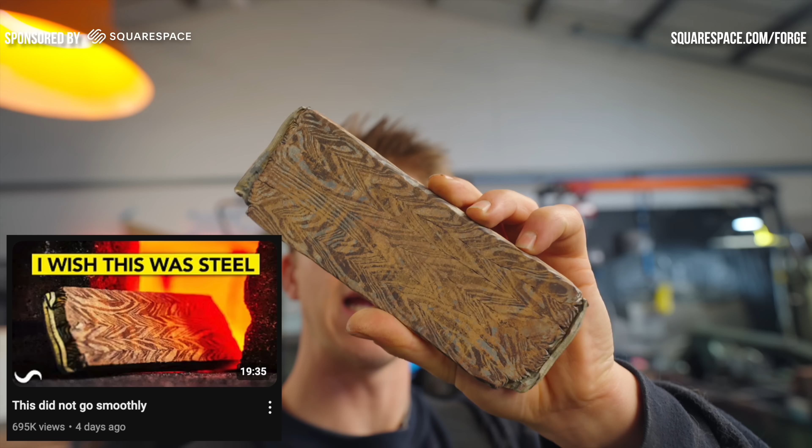In our last episode, we made up a multi-bar billet, and it turns out I definitely don't have the process dialed perfectly for titanium Damascus. Frankly, I'm a little nervous about how this billet is actually going to turn out. We've got to get through this skin and take a closer look. I've discovered a pretty nasty warp. Let's go straighten out that bend.

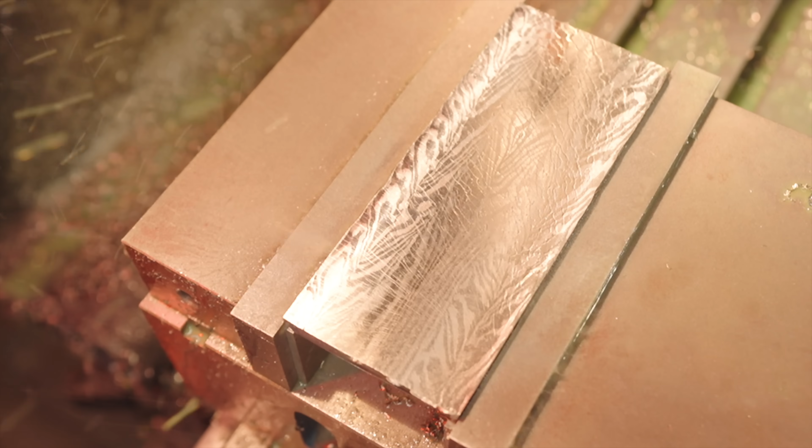At first glance, it's pretty cool, but look here on the end. Looks like we've got some delamination. That is definitely not welded. That's no good there. Yuck!

Ugh, it just doesn't stop. Every Sharpie mark is non-welded material. There's not a lot of thickness left to mill down. Maybe some of the cracks go away.

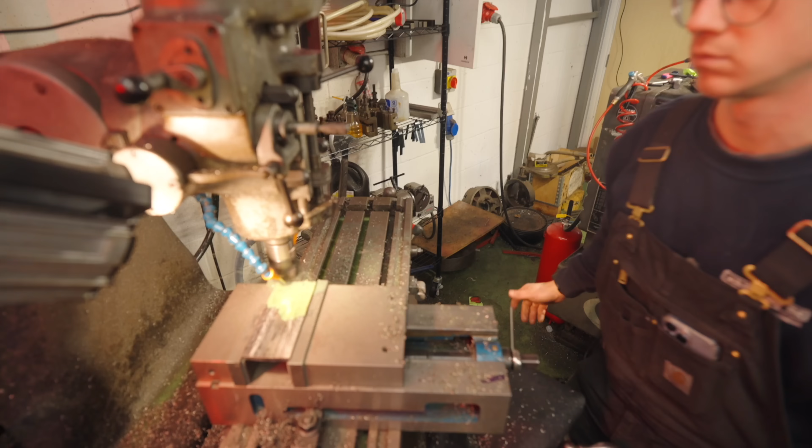Oh, better. That's better than it was. Might get away with something there. It's not perfection by any stretch of the imagination. We've got some funky spots in the corner, but in the middle it's not so bad.

I want to see how it looks with a little flame anodize before we keep cracking on. Golly, that looks epic. It looks so good.

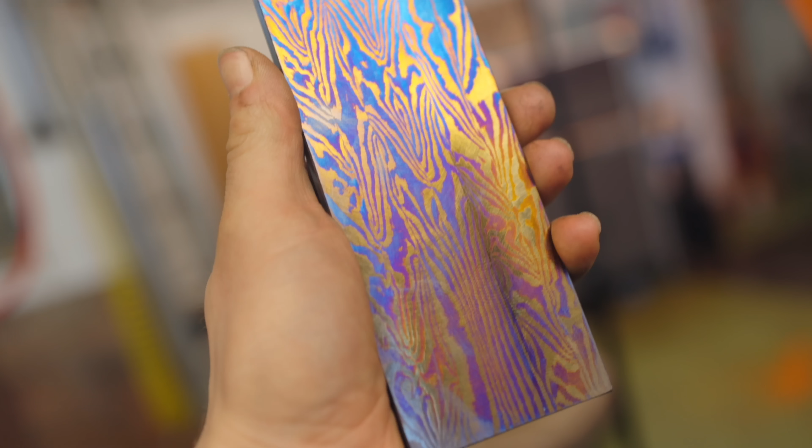That is pretty epic. Right, we now need some eye holes. We're going to cut them out on the Wazer, that's the plan. Just the eye holes first. We'll then machine the rest of it, and then go back to the Wazer for the final profile.

Of course, we're going to need a file for that. Not one of these, we need a cutting file. I guess files technically do cut, but this one doesn't fit inside the SD card slot.

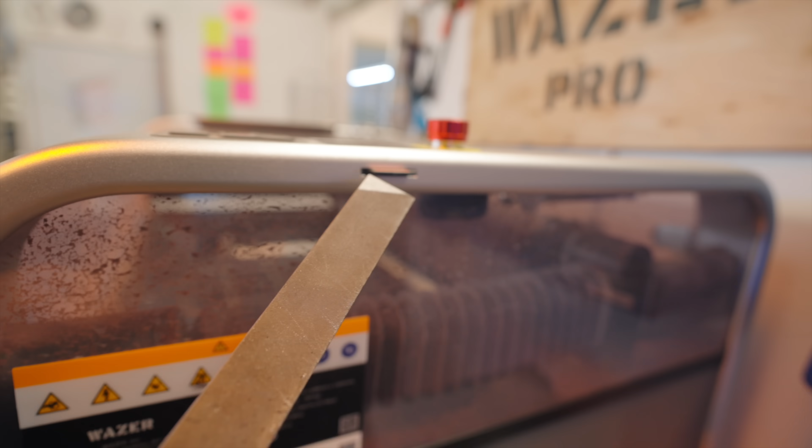So I took a picture of the glasses and then traced around it in Onshape. The plan is to go to the plasma CNC table and cut out a bunch of test samples from mild steel. I actually have no idea, I can't see anything because I don't have my glasses on.

So that we can test the fit of our cut file to the actual dimensions of the glasses that we're going to be stealing the lenses from. Pretty close, eh? The profile isn't fully identical though. Definitely needs some work on the hole shape.

How funny is that? They just sit there. Oh, very smart glasses. They'll be even smarter in titanium. Is titanium your favorite metal?

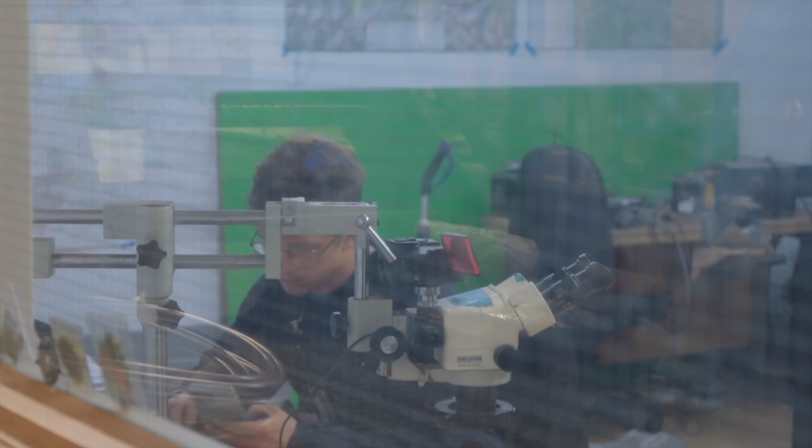So I've been doing a ton of iteration, specifically to match the curves to the lenses that we have. This is obviously a massive concern. Fitting up one of these lenses to a machined titanium frame is going to be really difficult. So I want it as close as possible. Not so close that we end up with gaps, but also not so far away that it's going to take an absolute age to file it to get it to fit.

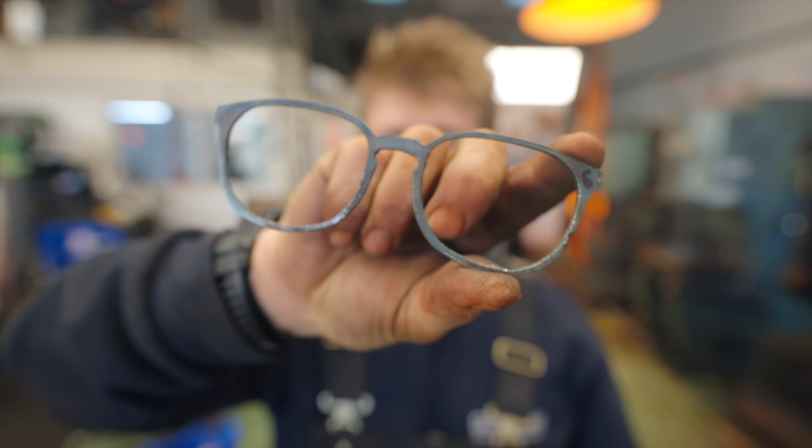Right now, I've got a flat plasma cut sample as well as one that we've done a little bending to. Bending is important because the lens itself has a bend, so it's more difficult to marry up when the time comes. The plasma cutter has been perfect for this because I was able to hop from the computer to the plasma cutter, and in about 10 seconds, a new part drops off.

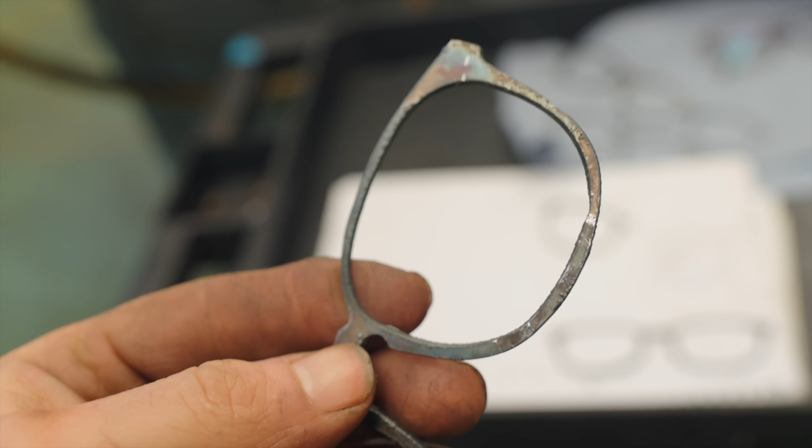But to actually cut out the final piece, we're going to be using the Wazer. The reason is the Wazer isn't putting any heat into the part, it's not going to melt it in any way around the cut. It's going to make a cleaner cut than is possible with a plasma table. Frankly, I don't even know if you can plasma cut titanium, so instead of experimenting with that today, we're now going to bring this into the Wazer.

But I can't just take the same cut file and put it into here and go straight to cutting our final piece in titanium. We need to do a test cut here, but hopefully only 2 instead of 6, so we can work out the offsets we need. What do I mean by offsets?

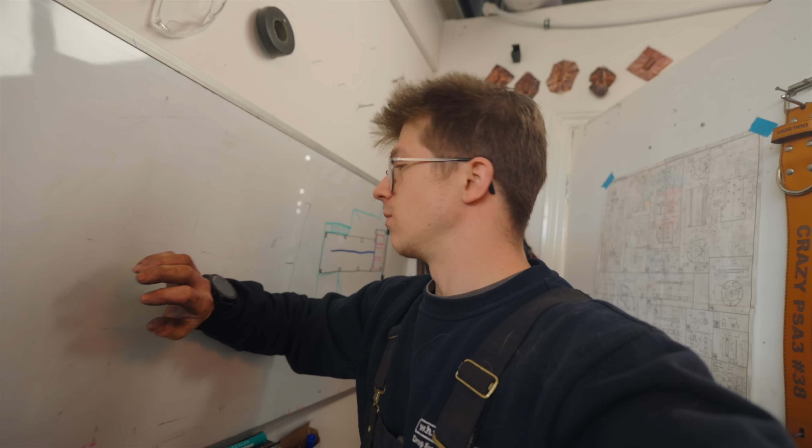Well, on the computer, what we're doing is making a line that is infinitely thin. It has no thickness. However, when we water jet or plasma cut, the stream of water and abrasive, or the plasma cutting stuff, has a thickness to it. And it removes that thickness from the parent material, just like a handsaw.

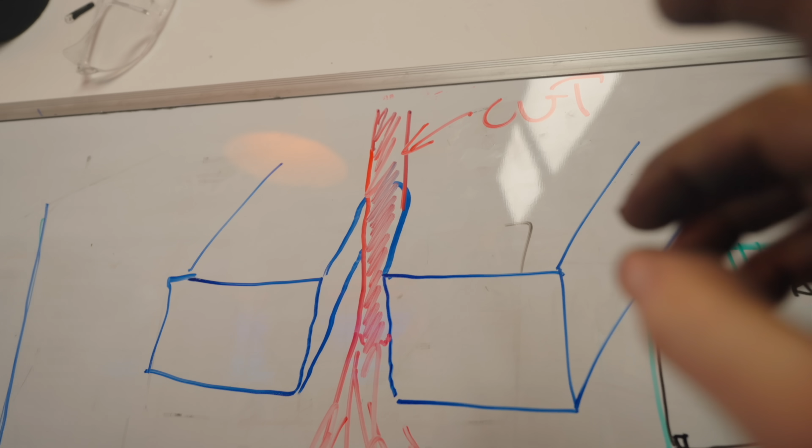And with a handsaw, you've got to choose on which side of the line you cut. But the benefit here on these two machines is if we find after our cut that our imaginary line is over here, we can change the offset, move it across by X, and hopefully hit our line.

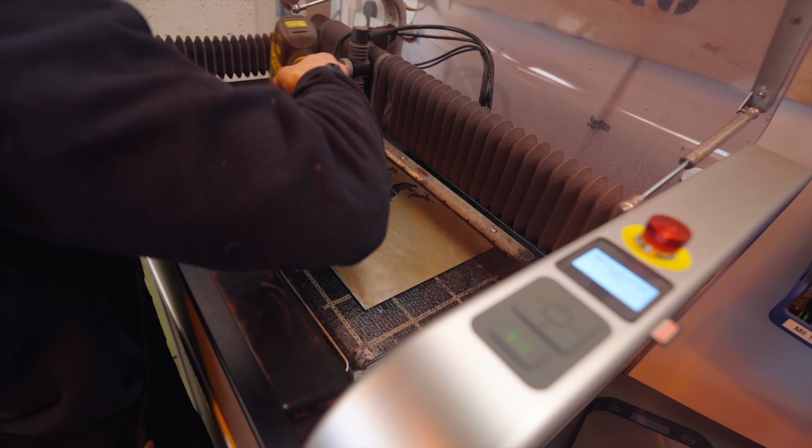Looks to be bang on. Oh yes, I think we're winning.

Now I've got to find out where on our titanium this is going to go. I've got to plot this out exactly so we can cut the eyes out before we do the bulk of the milling. Then we need a clear enough datum or reference surface to put it back in the Wazer to cut out the rest. Why do I have to do the water jetting in 2 steps?

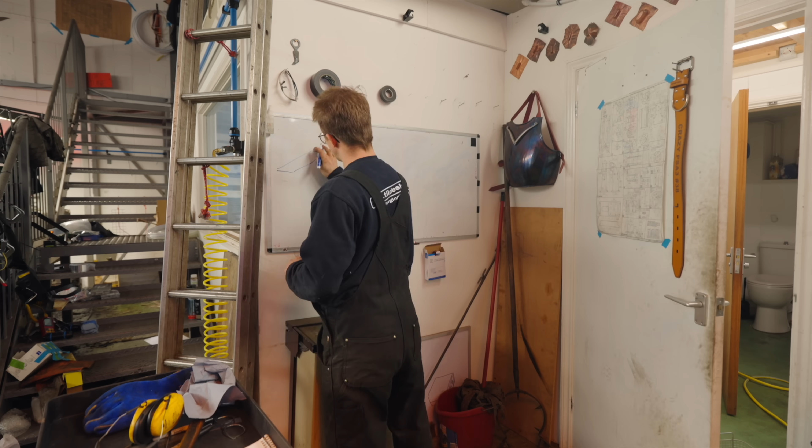I think I've got a new plan. So it was going to be like this, then machine down this stuff, leave some material for the hinges, leave some material for the nose thing, and then back to the water jet again. But I then realized I could just do this: leave a little bit of material for the nose, a little bit for the hinges, and then go to the water jet with a little bit of support to keep it upright, to cut out the whole thing in one shot, eyes and frame too.

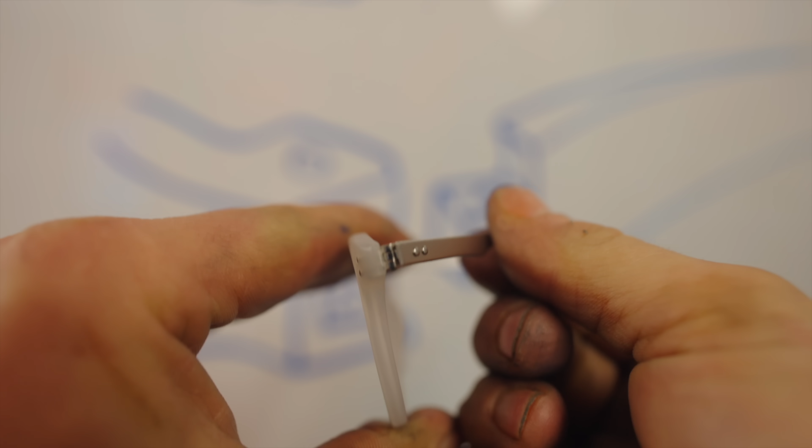But I've just realized I can change my plan of attack here. That was on the assumption I was going to tackle this area by doing that - mill out a little slot, little tenon, pivot, bish bash bosh. But that was before my eyes were ripe to see what was in front of me. I know there needs to be some sort of pivot, so I started thinking I'll just leave a nice mass of material there, we'll tackle it when we get to it.

But it didn't matter that I'd picked the glasses up a bunch, and in fact worn this exact design of glasses for like 6 years - I didn't notice that the hinge on here is one I could feasibly take off and put on ours.

Have a look at those hinges. They're riveted on. You know what that means? They're going to be riveted off. But if I get these off our plastic glasses, installing them is just a case of milling a little slot with maybe a 4 or 5 millimeter end mill, and then riveting, pinning, or screwing it. That's going to save me so much headache and also makes our machining that much easier.

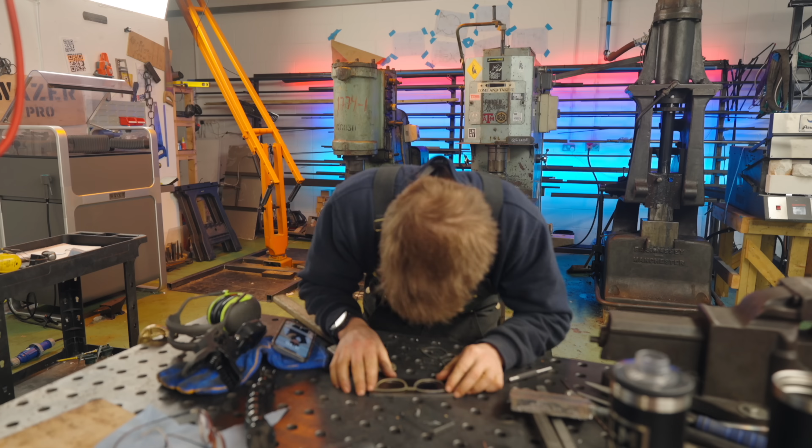So back to where we were - we've got a plan where the glasses live on the titanium. We could then hop back into Onshape, plan out what machining we need to do, make up a drawing that all the engineers amongst you are going to utterly despise, before heading back to the mill. Engineers, it's your favorite time.

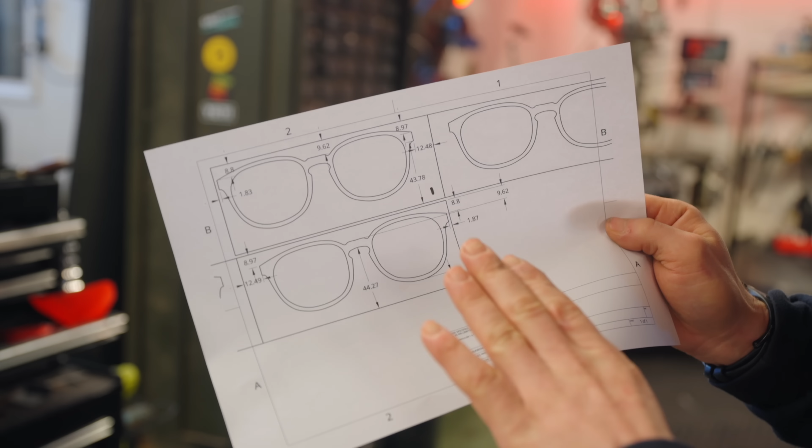Actually, last time I joked about my awful engineering drawings when we were making the rivet snap, all but one of you were very kind about my drawings, at least to say okay Alec, the drawings are disgusting for the actual standards that drawings have in industry, but for you, and that's what counts, they're perfect. That was true, they did the job. These, however, are even worse. But for me, I think they're gonna do the job.

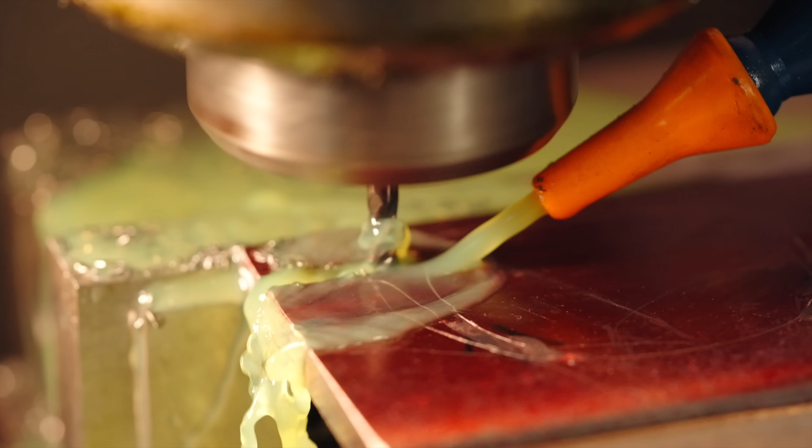So right now we are milling the slot that the hinge will sit in. It's starting to look like a pair of glasses. Bit of a stretch, that - it's just a sketch with 2 little bits milled out the sides. Well, they've got to start from something, all right?

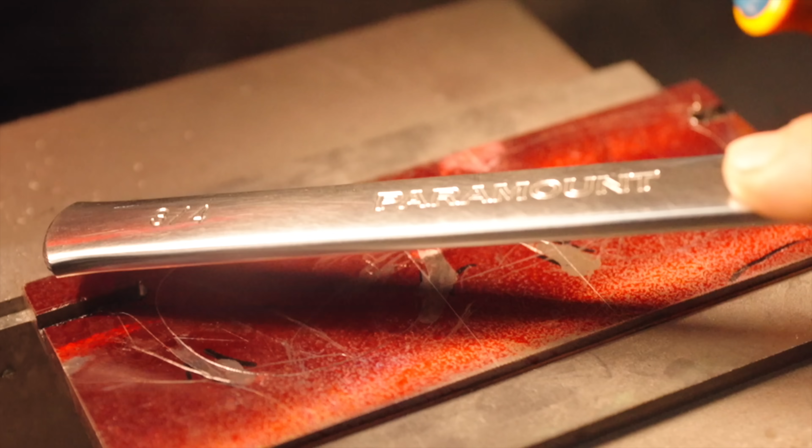Now I'm going to change tools to a 12 millimeter end mill. We're going to scrub off 2.3 millimeters of all of this, a little there, a little here, and I'm going to leave this nose piece proud. We're working on the back of this thing, and I need extra material to carve those nose holders out. You can see on this sketch, that's what we've got to leave - 2.3 millimeters high. One nearly new 12...

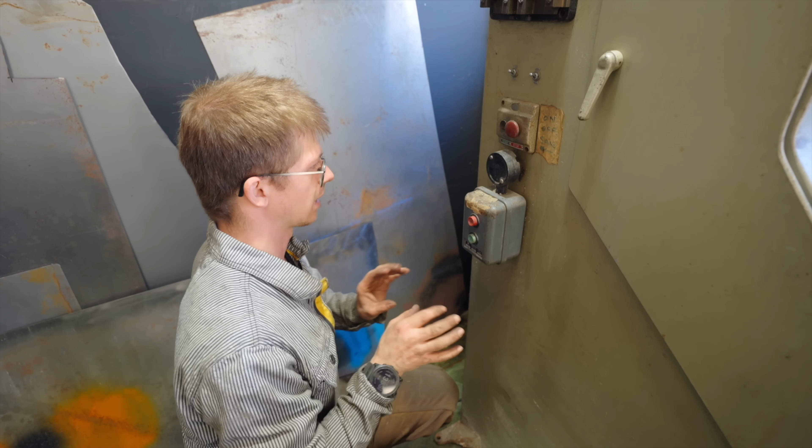I've never heard you make that noise. Jamie, it would be really nice for us to have a working relationship that lasted our whole lives, but there's a point in time, like if I'm 55, you can't be doing that, because I might have a heart attack. Has there been a worse jump scare? Oh, definitely with the electrics. Was it the one with the bandsaw? I hate this stuff so much. It might be the one with the bandsaw. I was very scared with that bandsaw - I thought I was going to electrocute myself anyway.

Got a ball end mill there, so we can make a nice, smooth little fillet.

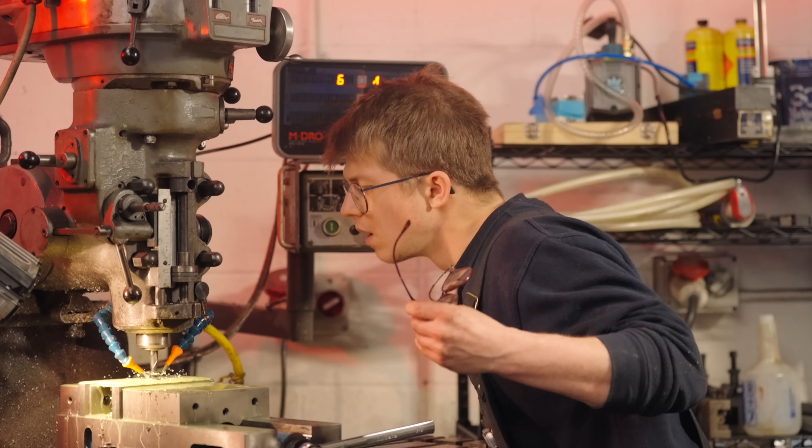Jamie, have a look at that. What does that look like to you? Looks like some sort of skateboard ramp. Doesn't it look like the back of a pair of glasses.

The scariest moment in machining for me is deciding when is the right time to take it out of the vise, because once you take it out, you can't ever put it back in quite the same way. Good thing I was thinking about this, because I can now put a stop on the vise, so worst comes to worst, I can slide it back in and it'll be close—at least close enough for the tolerances we're dealing with, because we're dealing with some pretty fat tolerances here.

Just like we can't expect to take this out of the mill and put it back into the mill to the 1/1000th of an inch of the same spot, or the 2.5 hundredths of a millimeter to the same spot. Taking this out of the mill, flipping it upside down, and taking it to the water jet, it's going to be impossible to get this dead nuts.

So I'm going to have to build in some leeway. I talked about offsets earlier. Well, especially considering this is the final bit, I'm going to increase my offset by something like 0.5 millimeter, 20/1000ths of an inch, or about that much, all the way around. That'll all have to be filed off and ground off, but it's hopefully going to give us that extra little bit of leeway in case something isn't lined up.

Now, because this is pretty square, and we can use the computer to line this up on the water jet exactly where it needs to be, I'm hopeful that we can get it at least within that 0.5 millimeter. Now that I'm saying it out loud, I don't know.

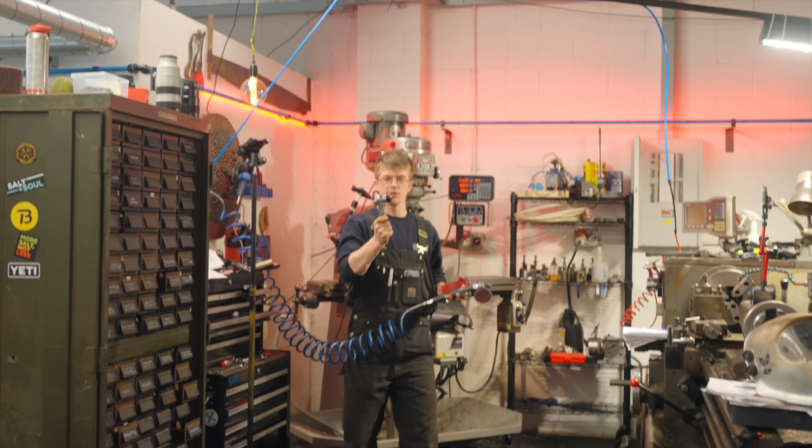By the way, workshop tool time. I recently got one of these things, the right angle variety. This one's cordless. I did buy one of those Amazon special deburrers, and it's okay—yet to have a full determination on that, so hang tight. But this one, with the little Roloc discs, it's a good shout.

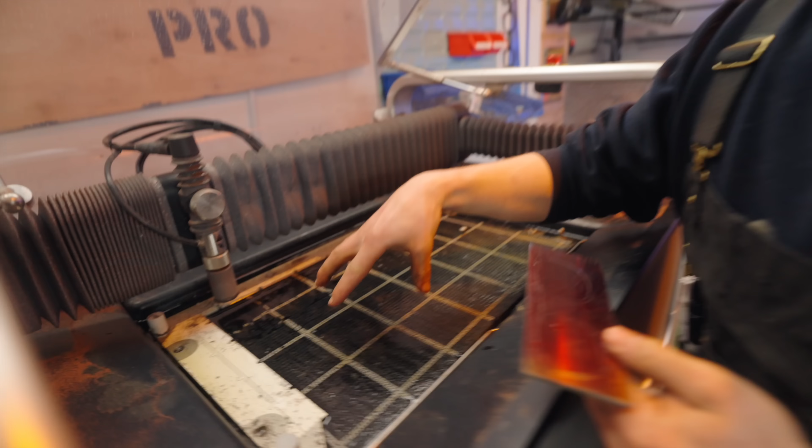So the cut beds on these waterjets, it's made of this kind of holy plastic. Are you supposed to pray to it? Something like that—anyway, it's sacrificial. So as you can see, we've done the bulk of our cutting over here, and as these things get completely used up, you've got to switch them out, which isn't a big deal. I've got some spares upstairs, but I don't want to be doing it right now.

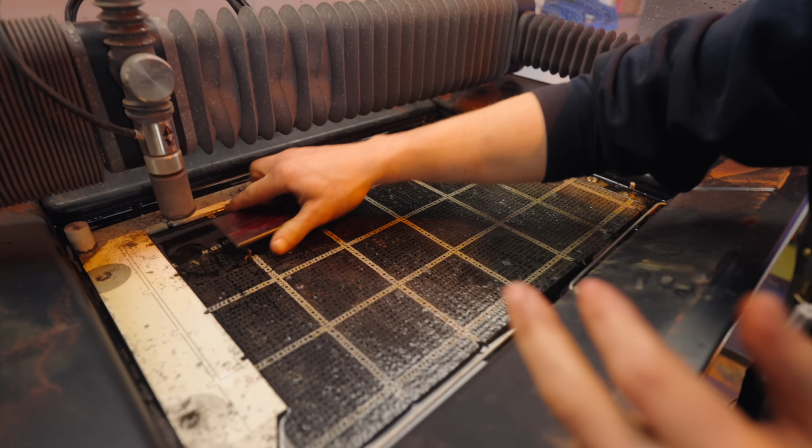This cut is kind of a datum line for us on this bit of aluminium. So theoretically, if we butt it up there, we know exactly where it is—it's 20 millimeters this way and 20 millimeters that way from the far extent of the machine. But I can't secure it on nothing, so I want it to be over here, but I need it to be over here a known amount—not just any known amount, the machine's known amount. I want to be stacking up as few tolerance issues as possible. So I've just had an idea.

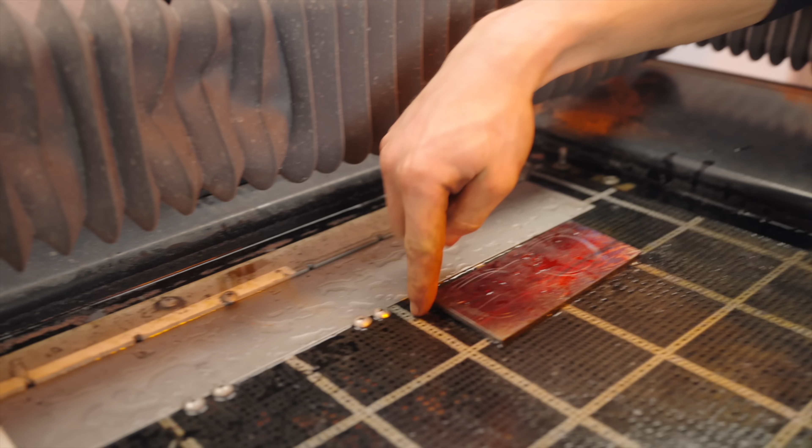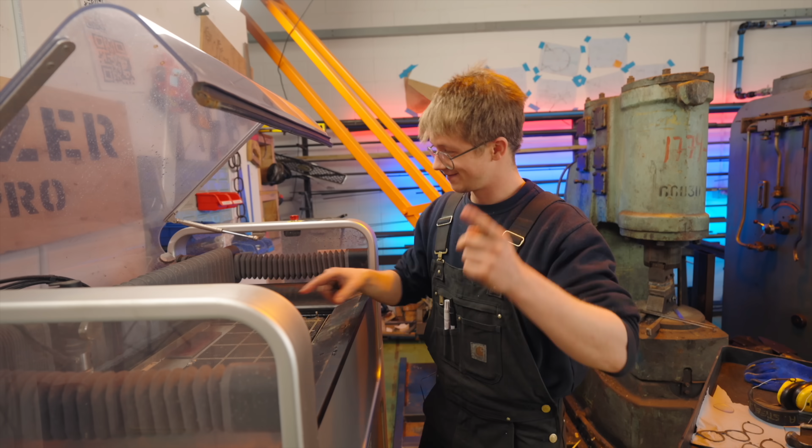If I go ahead and take this bit of steel, I butt it up to that corner, right, and we clamp it there. The plan is I'm going to tell the machine to come over 200 millimeters and make a cut on the inside of 200 millimeters. That way I can set this against the bit of steel, and I know that this edge is exactly 200 millimeters away from where the machine thinks the start is. See what I'm saying? Inside. Yes. And this is now going to butt up to...

What? That needs addressing. This is some naughtiness. Christmas present from my dad. Thank you very much. Naughty, naughty, naughty.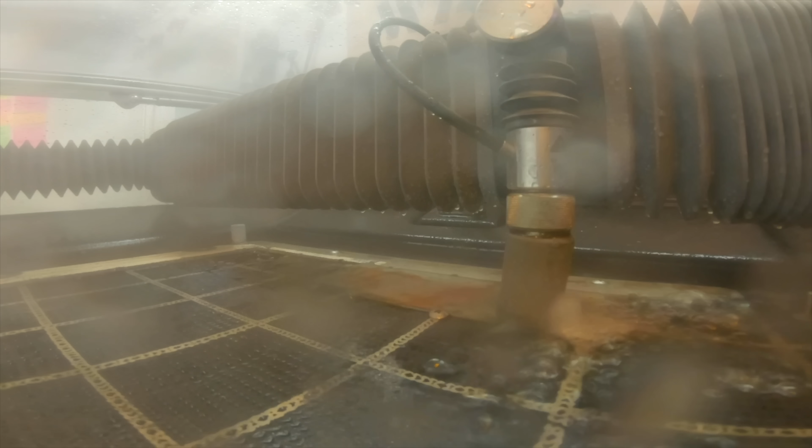Look at that. 21.11, cutting path, outside, offset 1 millimeter. Instead of just one end to reference on, I also want to be able to reference both axes, because I'm not positive that this frame hasn't moved. So I've now cut a complete holder out of steel. The titanium drops right in, and now we know exactly where the machine is going to think that it is.

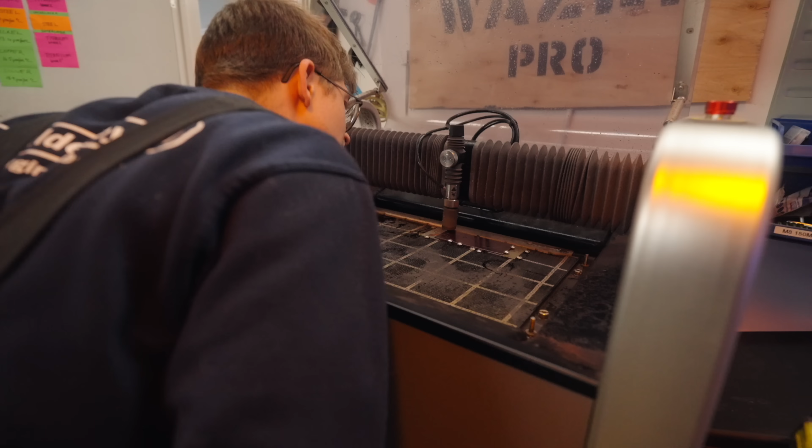Change the cut file. Generate drop file. This is terrifying. If I screw this up, this is a week of work down the drain. A whole week. All right folks, let's cross our fingers. Jamie, cross them. You're not going to cross your fingers. I'm holding the camera. But take that hand and cross your fingers.

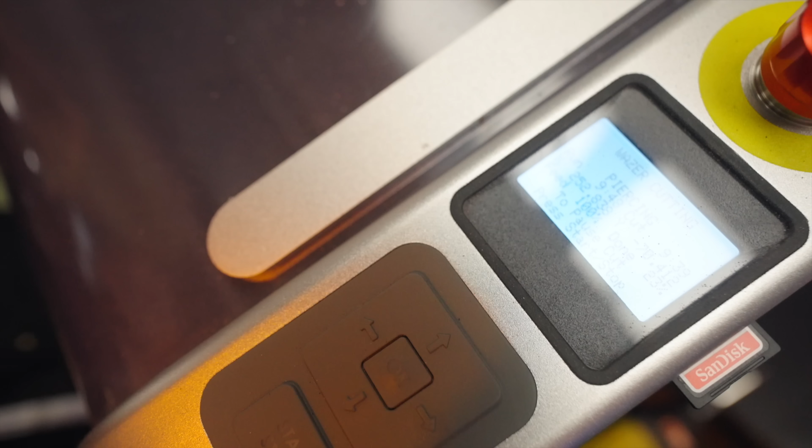I just heard a noise. What was the noise? Every single noise this machine makes is terrifying. What if something's gone wrong? It says we're 23% done. Nerve-wracking. 36% done.

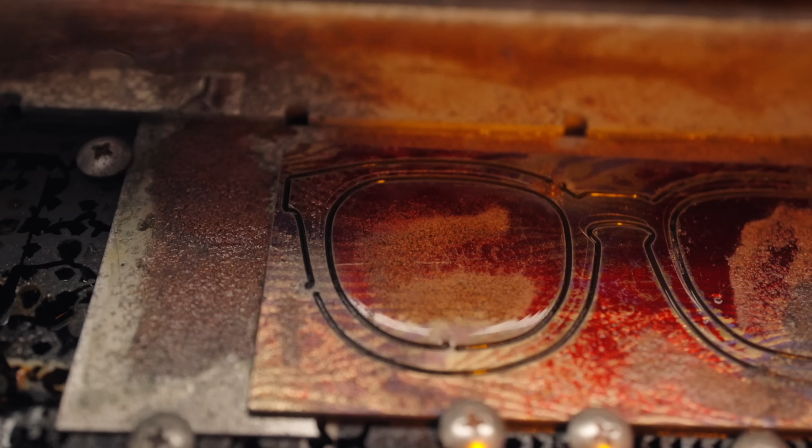It says cut complete. I think it looks like it should. Definitely not perfect. Bugger. I think we can work with it, but it definitely didn't end up where I thought the machine would think it was.

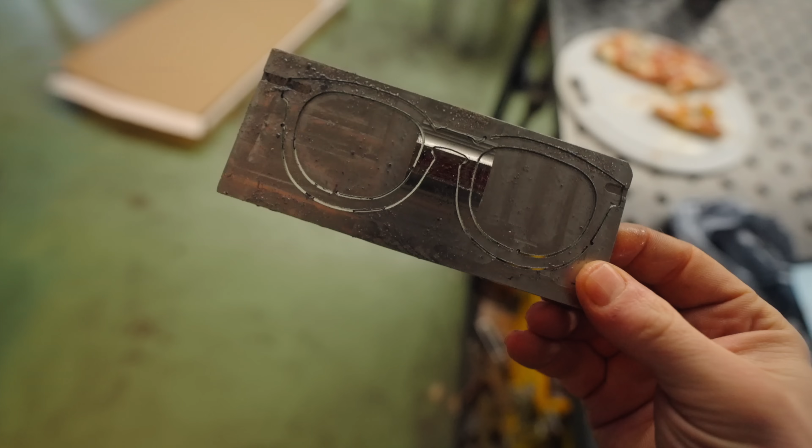I expected that machine slot to be about 1 millimeter lower, same on the other side, and the machine slot on this side seems to be cut a few millimeters less deep side to side than it was meant to. We can also see that effect on the nose area, so either my machining was off or the way we installed it in the waterjet was off. I don't exactly know, but my first impressions are we can work with this.

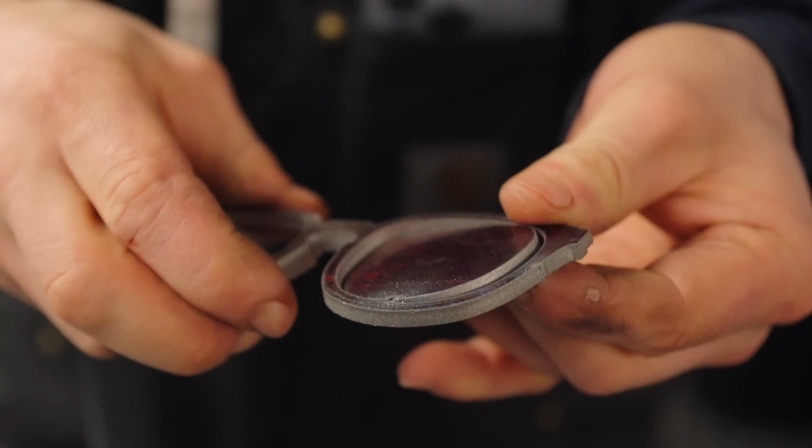Now all we've got to do is add the hinges. Oh yes, I've got a naughty idea.

Shoot, I think I've destroyed it in the vise. Like a layer just fractured off. I'm barely gripping it, completely barely gripping it. You see what I'm seeing? No. We might get away with it in the contours.

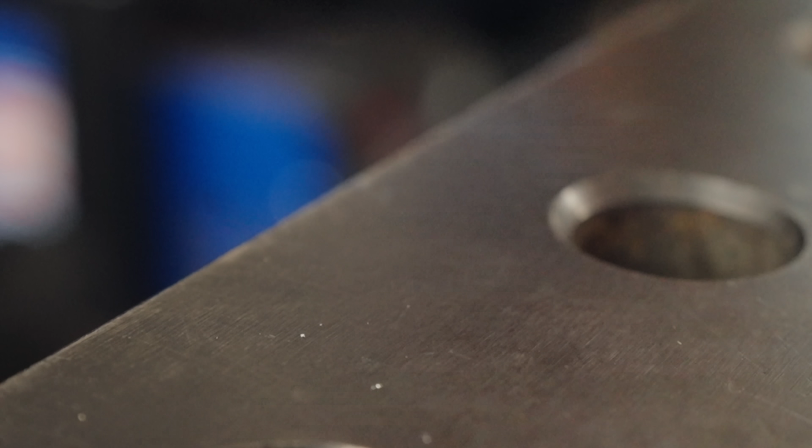Oh boy, I think we'll be okay. I actually think we're gonna be okay. Hell yeah, we would have radiused that anyway.

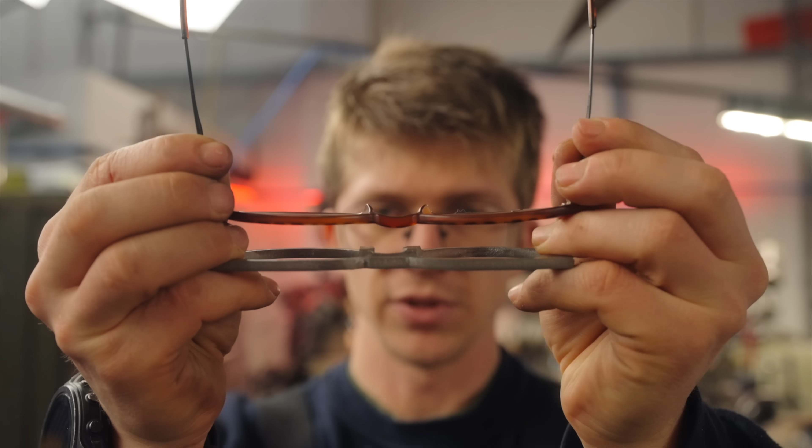We've got to put some angles on her. You see, got a big old 30-degree bevel on it from both sides, actually. My plan is that we file a bevel around the whole thing to let it sink in, but we also need to bend the bridge. You see that? We need that little dog leg put in there, as well as an ever so slight arc across the whole thing.

Whee! Whoa, it's perfect!

Guys, what the hell is this meant to be? Looks just like a pair of glasses, right? I need a 3D printer. We are gonna try it again in steel.

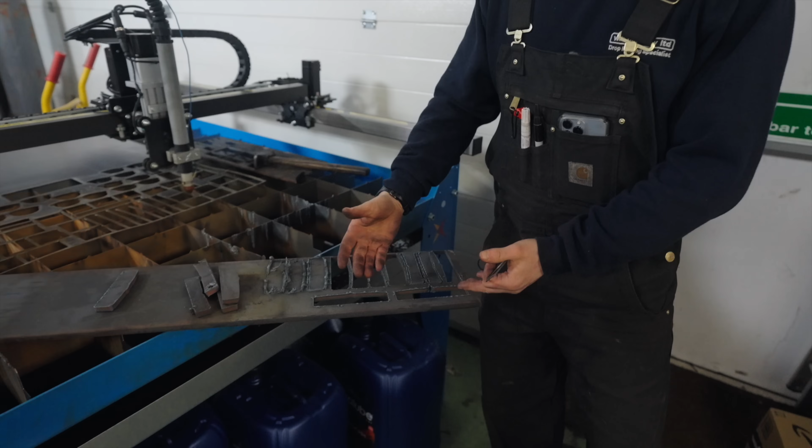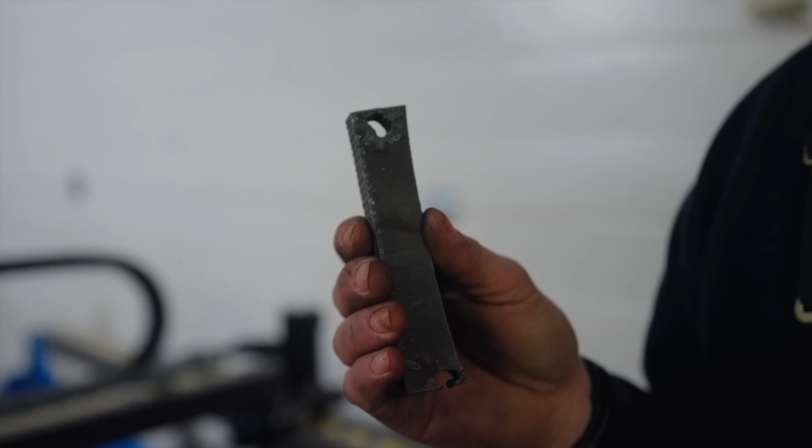There is apparently a learning curve in plasma cutting thicker material, as we can see by the 3 pieces that remain firmly attached to the parent material. What have I learnt? Well, first of all, I can select where the machine is going to lead in from - that would have saved some scrappage. Trying to cut a 9mm hole in 10mm plate is a bad idea, especially if you don't turn up the amperage on the machine. For some reason I thought that selecting 65 amps here would make the machine do 65 amps, but it doesn't, Jamie.

We actually got a really beautiful cut once I had used up almost all the steel in the workshop and figured it out. That is crazy to me. Look at that - that looks like it could come off a laser. Okay, maybe off a laser is pushing it, but this is probably a $500,000 machine that made that cut, and that's our plasma table.

Not bad. I think there might be a way of making do without actually having to cut 10 total pieces, because look at this - drop that in there. That's pretty freaking close, eh? I know exactly what it needs.

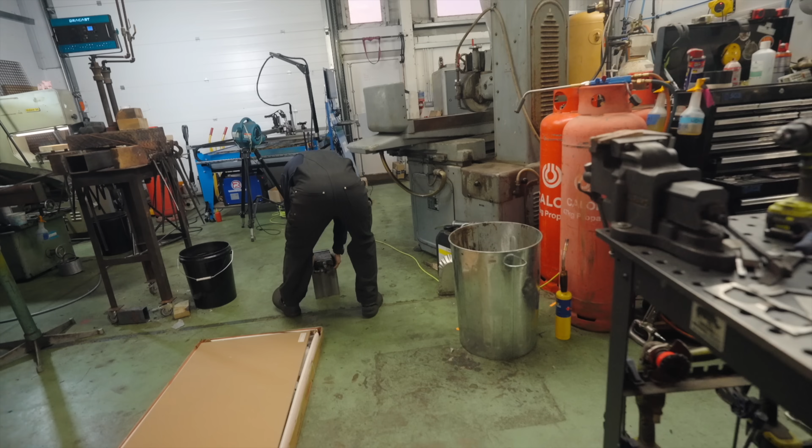That's exactly what we need. Now it's one thing to do it in steel, it's another thing to do it in a material that we've been battling for over a week because of how fragile it is and how little it wants to stay in one piece. And it also has a nose bridge.

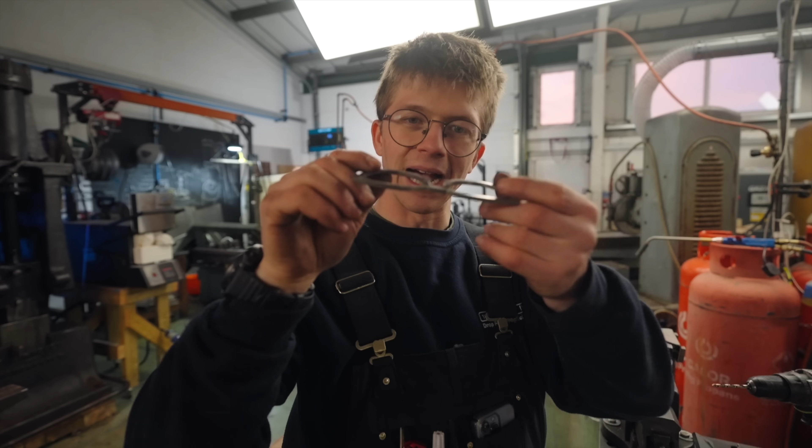Just needs to be a tiny bit higher up. No, not like that, like that. No? You just raised this up. Oh, it's the other way. And then you raised that up. Know, that's why I'm confused, Jamie. It's gonna go up just like this.

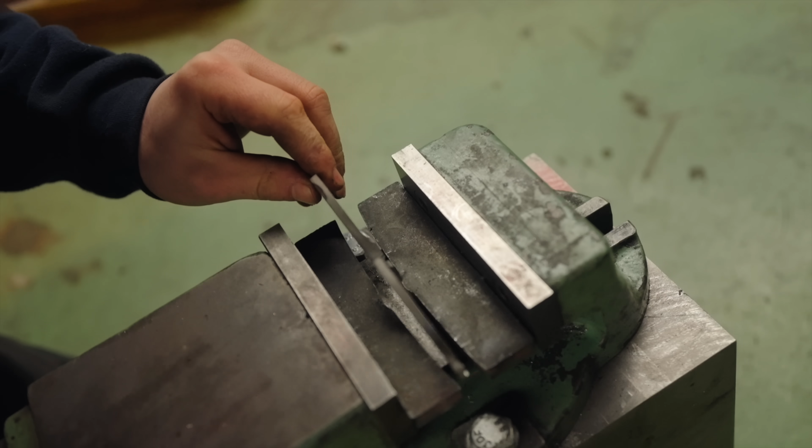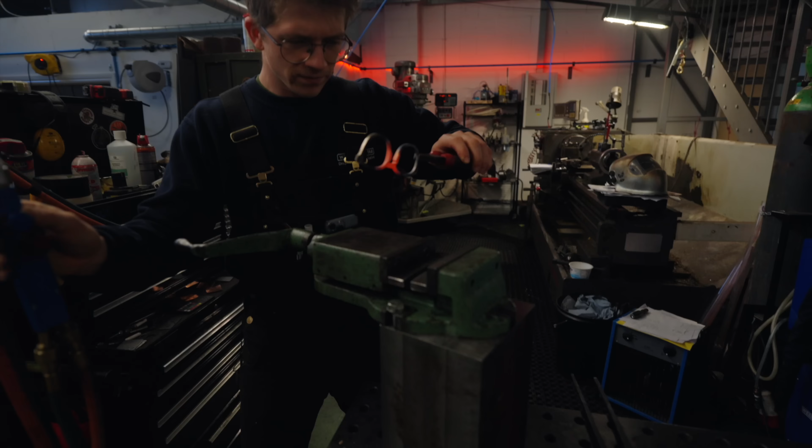And then, after a week's work, we're gonna snap our glasses. Well, it's not in the middle. Doesn't look quite right from the top, you know what I mean? That's better. They're a bit flat along the lenses.

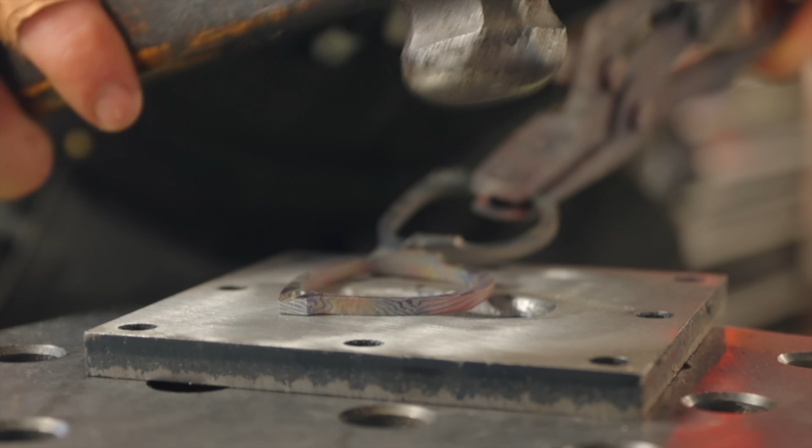Did you fart? No. Oh, it was me. You shouldn't have said that, 'cause that's going in the video now.

After all that work making this beautiful multi-bar titanium Damascus, you actually can't see a whole lot of the multi-bar component of the pattern. Well, you're going to see even less once you make it half as thick. I know. It does look good though.

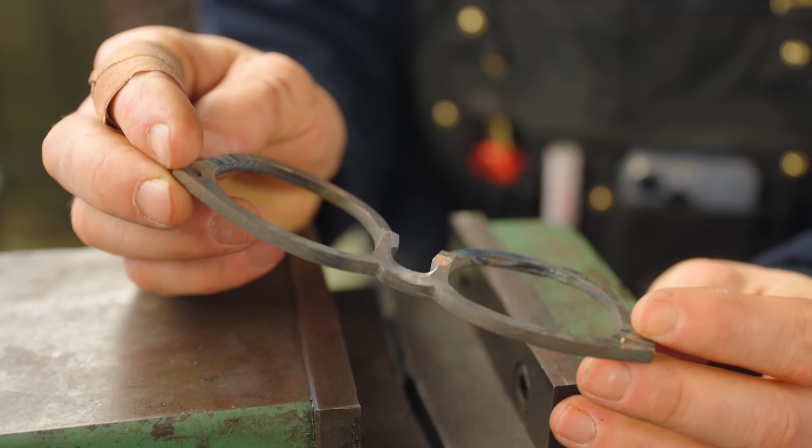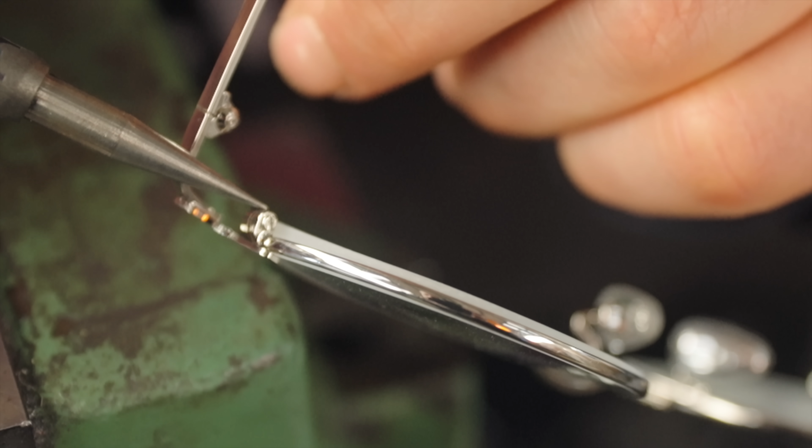Next step, glazing. We need to get these lenses fitting. What you'll see is the original lenses have a big old bevel on them. Depending on whether glasses are made from plastic or metal, they typically install the lenses in a couple different ways. On plastic, there's a corresponding indent, the negative of the bevel on the lens. They warm up the frame in some hot air, then just squish the lens into place. On metal, however, it seems they often have a separation in the material that makes up the rim with a glazing screw that then clamps that rim around the lens.

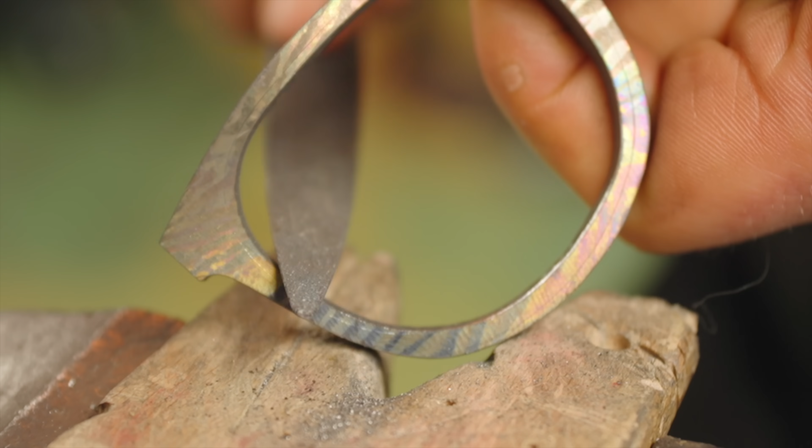I'm very appreciative for the help that I've got in the DMs. Unfortunately, a dollar short and a day late, because I did not design these to be able to have a glazing screw. So we need to find a way to get the lenses in here. This is designed kind of like how a plastic frame glasses is designed, and we're definitely not going to be able to heat this up and push the lens in while it's hot. That's not going to happen. I've got no idea what I'm going to do. I guess I'm going to take some files and start filing. Titanium does not file very well.

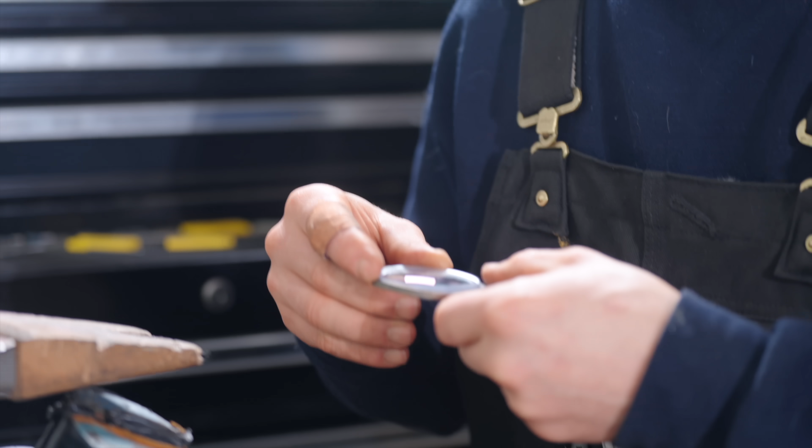I knew this was going to take some time. I knew this was going to be a hard part of the project. I don't know why, but I just tried to ignore how hard it was likely to be when I was considering this. And now I don't get to ignore it. Now I'm staring right in the face of having to fit up a glasses lens into titanium, which does not like to be filed or cut very easily at all.

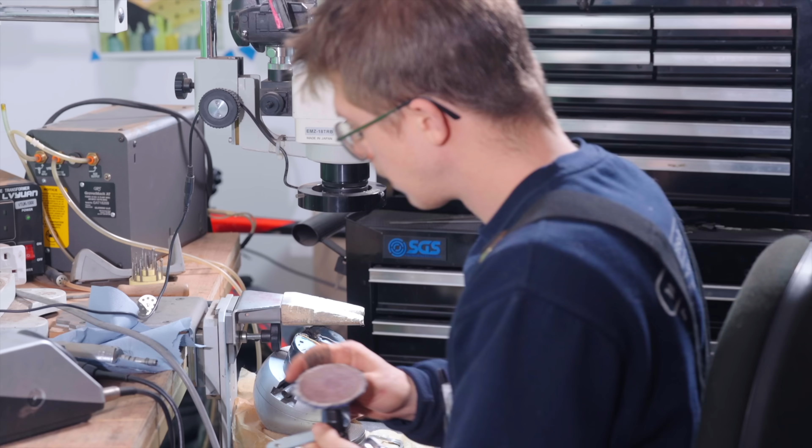We're making a little bit of progress, but I just decided I was going to go ahead and take the original frames from the workshop just to have a look at how these things kind of line up. But hang on a second, do you see something strange? This lens is for the right eye on my glasses, but is somehow for the left eye on the originals. How have I managed to take the left eye lens and make it for the... what?

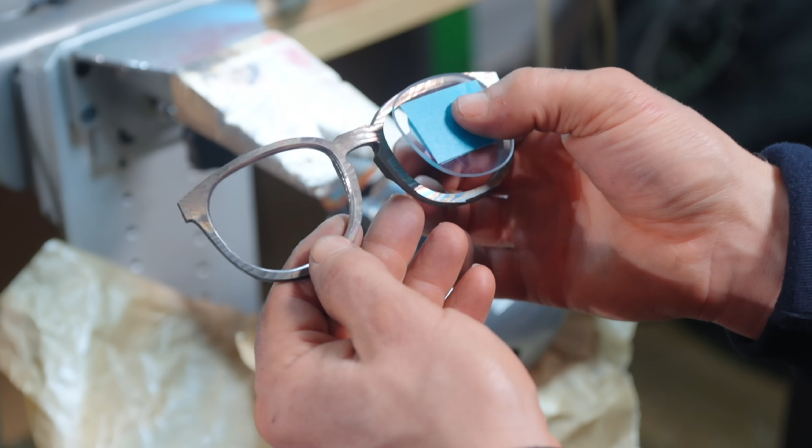Because of that extra offset, you could actually get the lenses in on the correct side - at least this one we could. But have I now ground away too much material around this bevel? Golly, I tell you what, we got very lucky. It fits even better than the wrong side that I've just spent an hour fitting up to it.

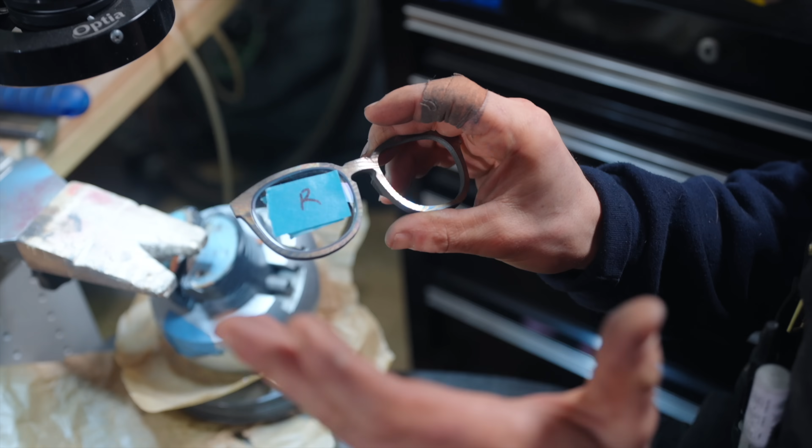So next up, I have spent all this time filing away the titanium. Guess what? In case you didn't know, plastic is softer than titanium.

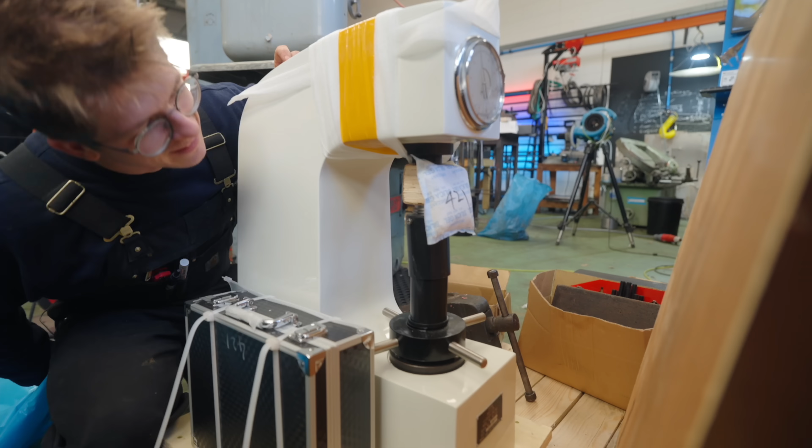Oh! Ta-da! It's a mini power hammer. It literally looks like a little mini power hammer.

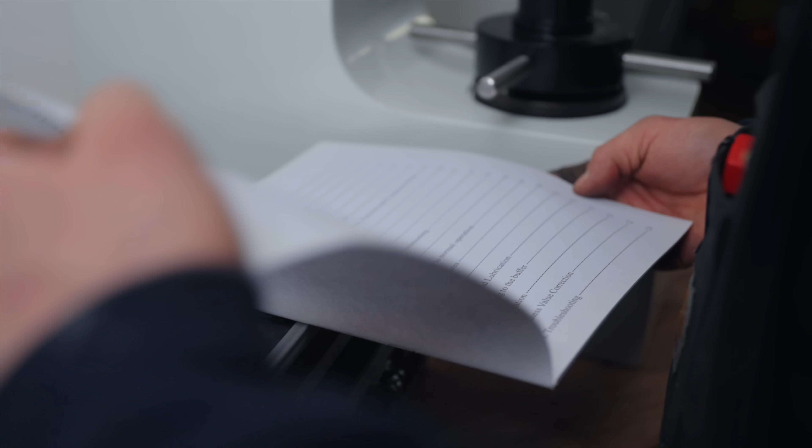Operation manual. Oh, that's a diamond right there. An industrial one, not to be confused with the blood variety. The test table should be built up with cements or metal, having certain stiffness and strength.

Okay, good. Off comes the retaining rope. Put a little calibrating block. This should be 25.7 Rockwell. Lift up the work table slowly to push up the indenter. Push against the little diamond tip until that goes around 3 times.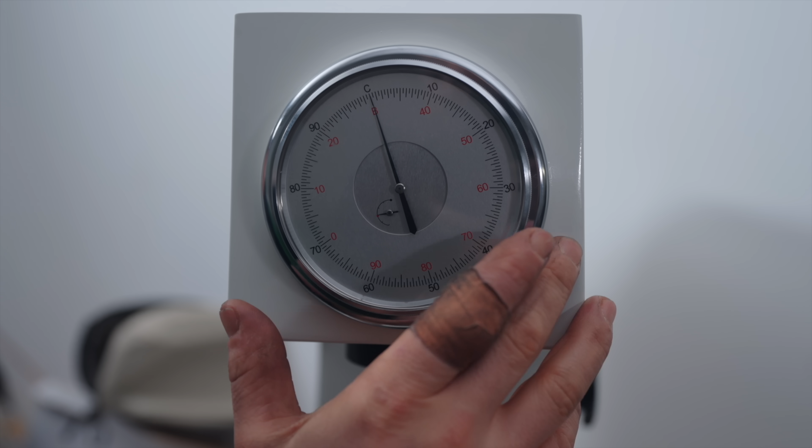1, 2. Pull the loading handle towards the front of the machine. Okay, I pull this towards the front. Ready? Doesn't seem like anything happened. Do not think we have done this correctly.

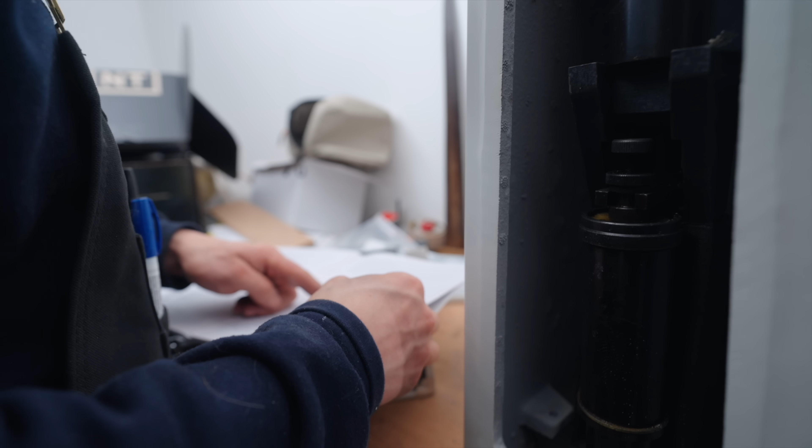This is just 3D printed. Well, if that's meant to be not there, it's just there for transport. Ah-ha-ha! Supporting block, I see! Oh, that's how it selects the weight, Jamie. Look, you change this. Oh, that's so sick! What a neat mechanism!

Wow. Wait, you're telling me that's 150 kilograms? I presume they use leverage to their advantage. I think that's it, Jamie.

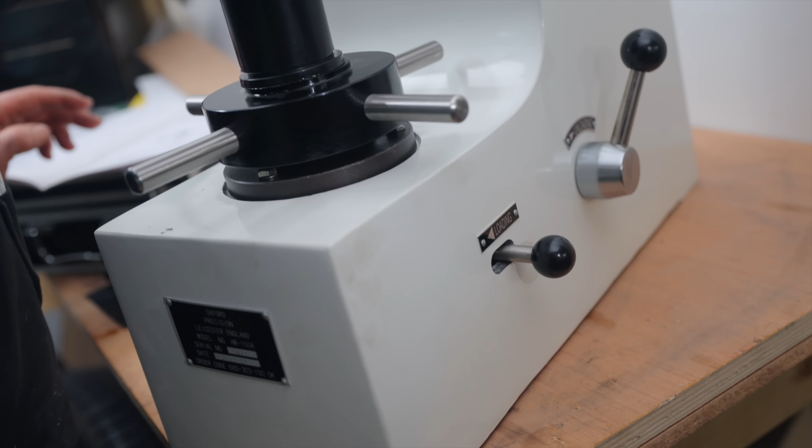It should work flawlessly now. Twist that puppy up. 1, 2, 3. Pull the loading handle slowly towards the front of the machine body over 4 seconds. Push slowly, 2 to 3 seconds. Yes! Kind of close. That's saying 41.5, 42.5. Let's try a softer one.

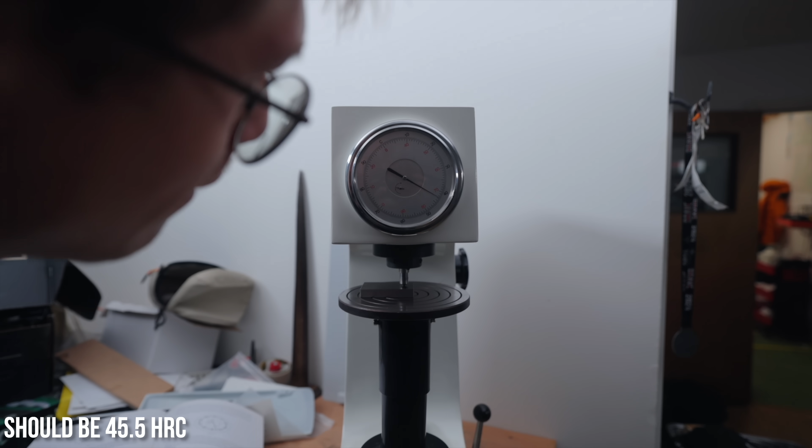This should be 25.3. Unloading. 1, 2, 3. Ooh, 21 Rockwell. Potentially we're not calibrated right. That's meant to be 45 Rockwell, and it's showing as 38.

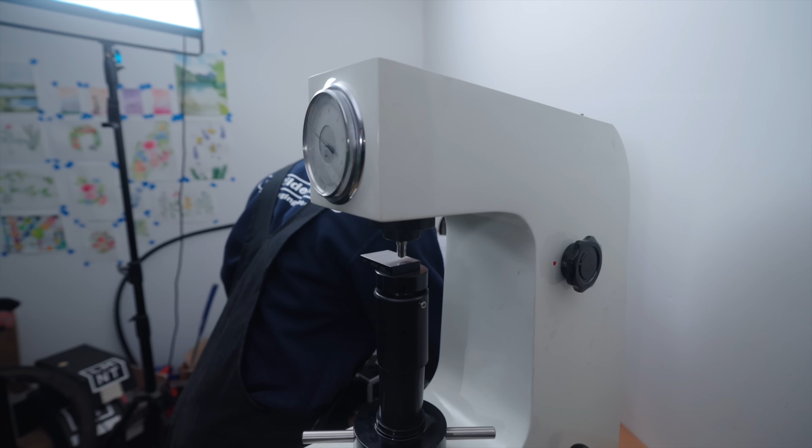I'm filing on an important component that's involved in the calibration of our science equipment here. And it tells me that I'm incredibly certain this certificate of inspection and calibration is a complete fraud, because there was steel here that prevents it from even being calibrated just right.

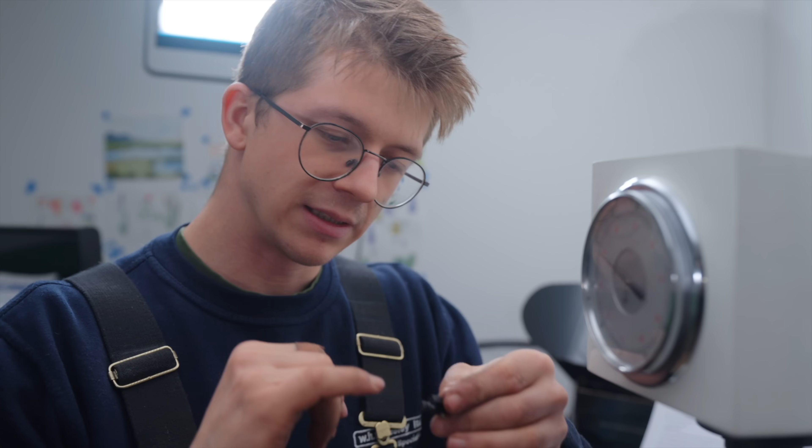It's reading about 4 Rockwell low, and so I need to adjust this little slider. It's part of the mechanism up in here, and I couldn't slide it back enough to get it to read correctly. It's getting worse, that's the opposite of what it's meant to be doing. It's meant to be getting better, not getting worse.

1, 2. Oh, it's so much closer. We got this close enough for comparison's sake, which is great, because frankly that's all it is that I do here. I compare something done this way to something done that way.

Anyway, the reason we're here again is to find out if titanium is softer or harder than the plastic that's in glasses lenses. One cool thing is we're going to be able to compare the hardness between the different grades in our titanium Damascuses.

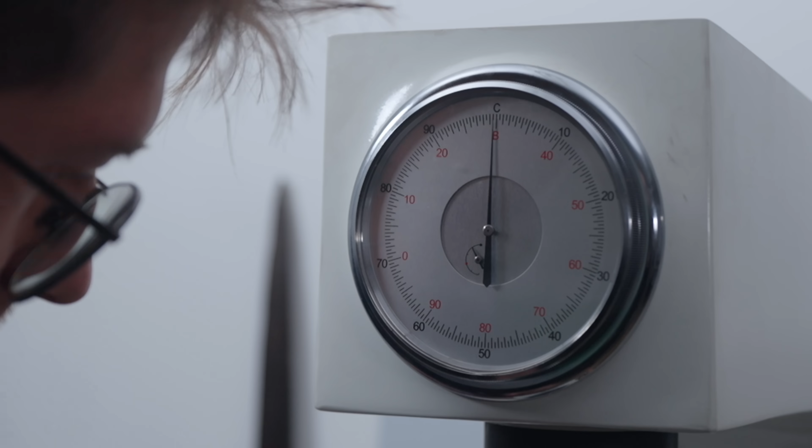All right, 25 Rockwell. Try another spot, shall we? 42 Rockwell on a different bit of the alloy. Can you see the different size of the indents? Same force, we're getting different sized indents. That's the whole way that this thing works.

You put a force on a tiny, tiny little point and you measure how deep it goes. If it sinks in really deep, it gets a low Rockwell hardness score. If it barely sinks in, it gets a very high Rockwell hardness score. And what we're finding is we have a crazy difference in Rockwell hardness between our 2 alloys.

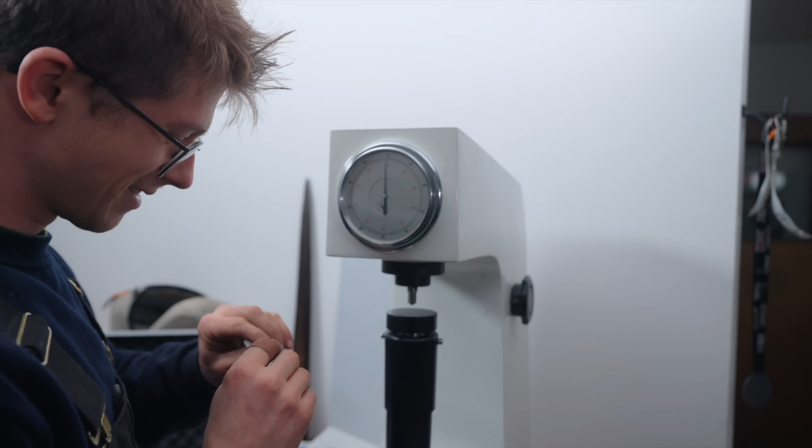Anyway, oh yeah, glasses, lenses, science, boys and girls, yeah, very important science. 1, 2. It's currently trying to tell us it has a Rockwell C hardness of 80. When you see the size of the imprint, that means it's not even on the scale.

The summary of that is, why on earth am I trying to file my glasses to fit the plastic, when it's going to be a lot easier to file the plastic to fit the glasses?

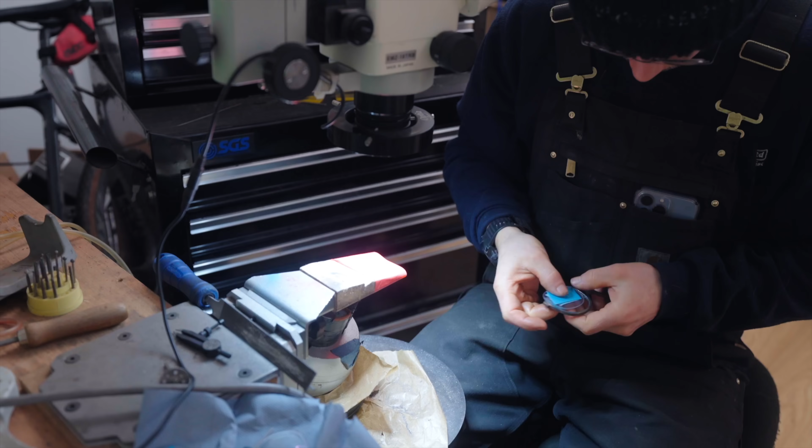Done a few minutes of filing, and it's getting there, but the closer it gets, the more I can see some other problems. The one I've spotted now is that our frames have too much curve. You know that exact same curve I put in with the torch not so long ago? Well, I did too much of that relative to the curve on the lenses, so we have to uncurve it.

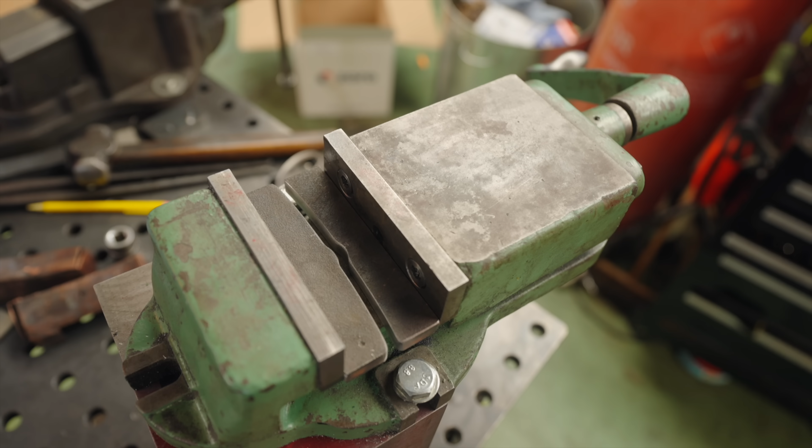Here we go. Oh, let's see how that looks. Looks like a good improvement to me.

So close. Oh my gosh! Holy crap! That's frickin' wild. Right lens, good. Onto the left.

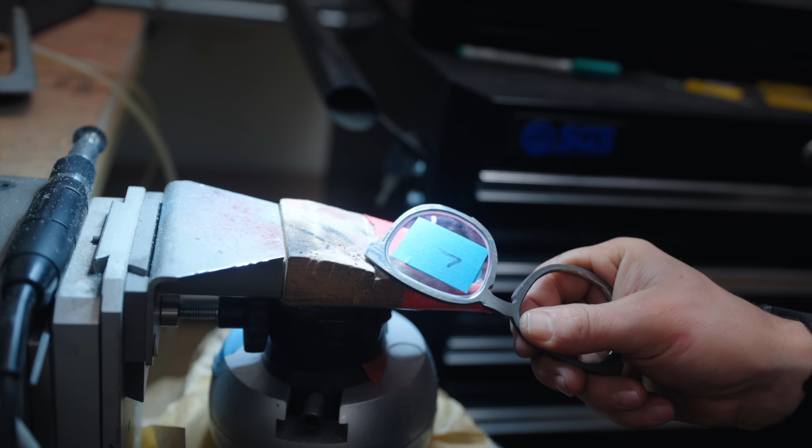Second lens is in. Woo-wee! This is absolutely nuts. We've got 2 fitting lenses. Next up, we need to work on the hinges.